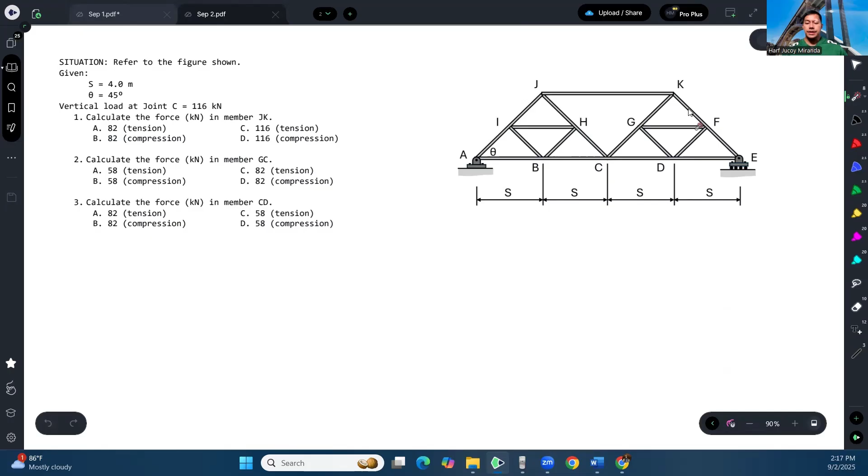Situation. Refer to the figure shown. So this is a truss. So you're given the dimension as 4 meters. So this is 4 meters. And then the angle is 45 degrees. Ito daw ay 45 degrees.

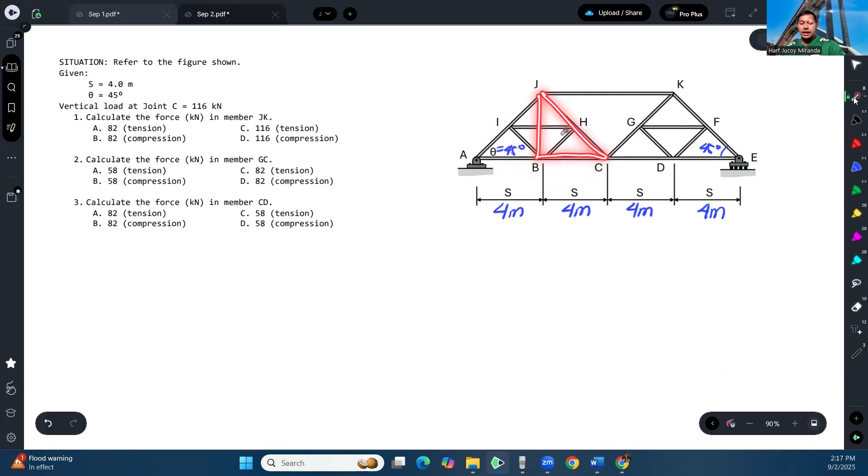Okay, so due to symmetry, we can assume na 45 degrees na rin ang kabila. Okay? Tapos, ganun din to. 45 na rin to. Kasi equal lang naman yung layo nito dito. So parang lumalabas itong triangle na to. 45 ito. Tapos sa gitna siya. So ibig sabihin, itong left triangle should be the same as this right triangle. So this would be 45 as well.

Okay? And with that said, we can measure that this height can be figured out to be also 4 meters. Why? Kasi if you draw a vertical line here and analyze this triangle, makikita mo na yung triangle na yon is 4 meters ito, tapos 45 degrees ito, so 90 ito, so 45 ito. So, ibig sabihin, 45-45-90 na triangle. So, dahil doon, isosceles triangle siya, so therefore, this is also 4 meters.

Okay? So, vertical load is at joint C. So, meron daw force dito, 116 kilonewton. Okay? So, ang question, what is the force in member JK? Ito. What is the force in member GC? Ito, member na to. And what is the force in member CD? Isa dito. Okay? So, the fastest way to solve these three is to use method of sections.

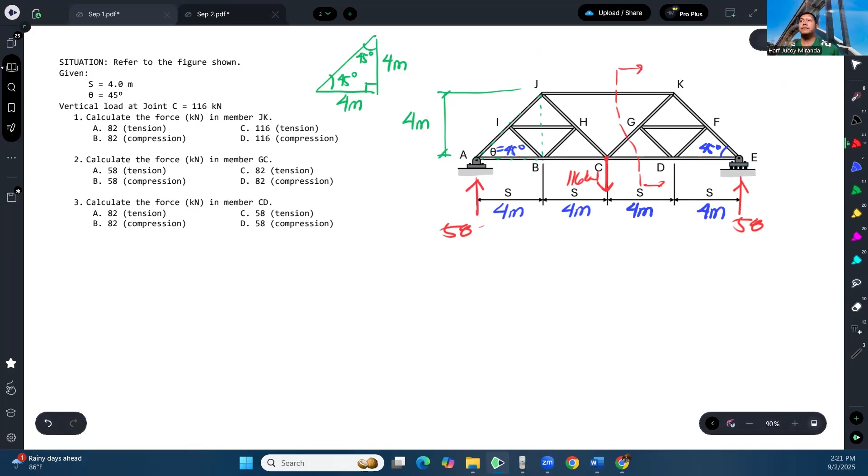All right, so now we are ready to compute for the member forces na required. So gagawin ko, magka-cut lang ako dito. Okay, and then I will isolate this side. Okay? So, ito kunwari yun.

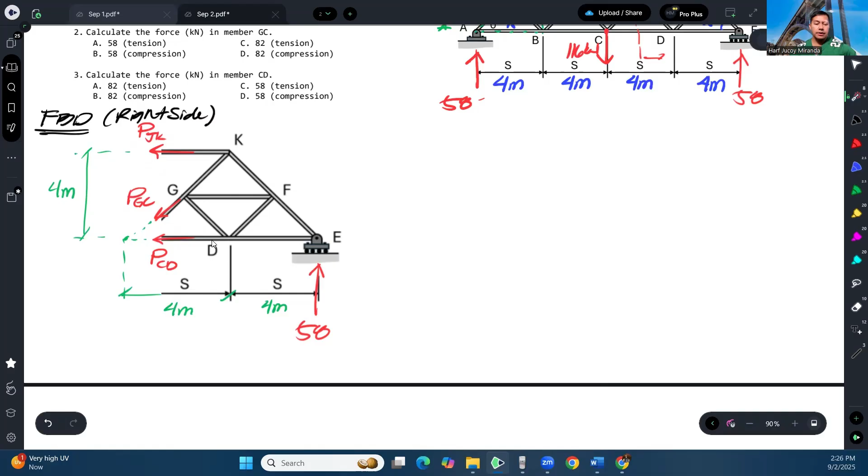Now, to solve for this, we will just apply equilibrium equations. No? So to solve for, let's say, ano ba unang tinatanong? JK. So I will just employ summation of moment. No?

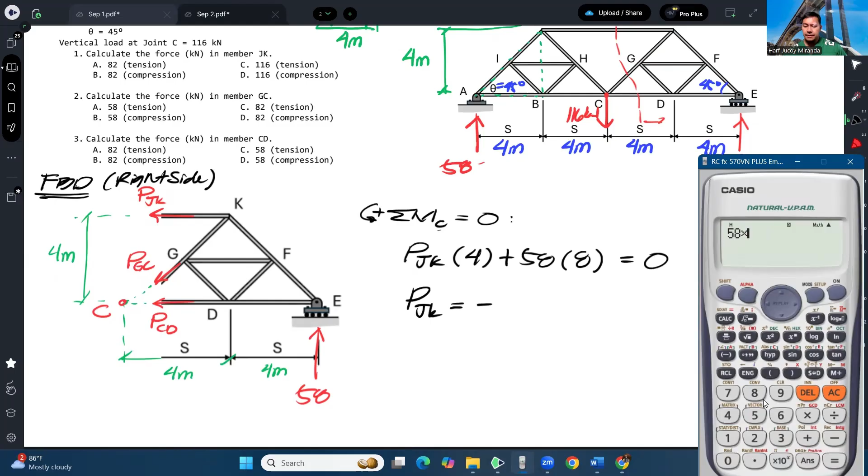So solving for JK now, that will give me negative, kasi na-transpose mo sa kabila yan eh. So lalabas siya 58 times 8 over 4. So that's negative 116. Okay? So sa assumption ko na tension, ibig sabihin mali yun kasi nag-negative. So that's why ang JK natin would be 116 kilonewton na compression. Okay, so therefore, ang sagot natin sa number 1 is letter D.

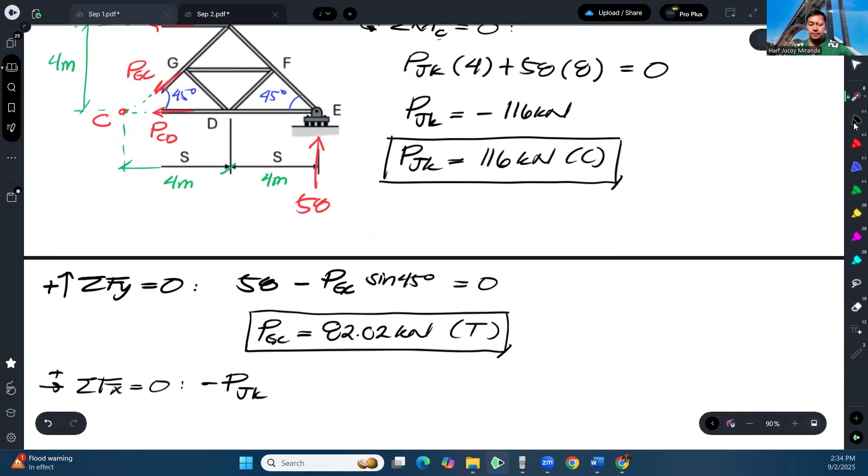Okay? Ito rin, GC. So, to the left yan, no? So, negative PGC, tapos cosine of 45, yung x component. And then negative of PCD to the left. That's it, no? All equal to 0. Wala naman kasi itong horizontal reaction, di ba?

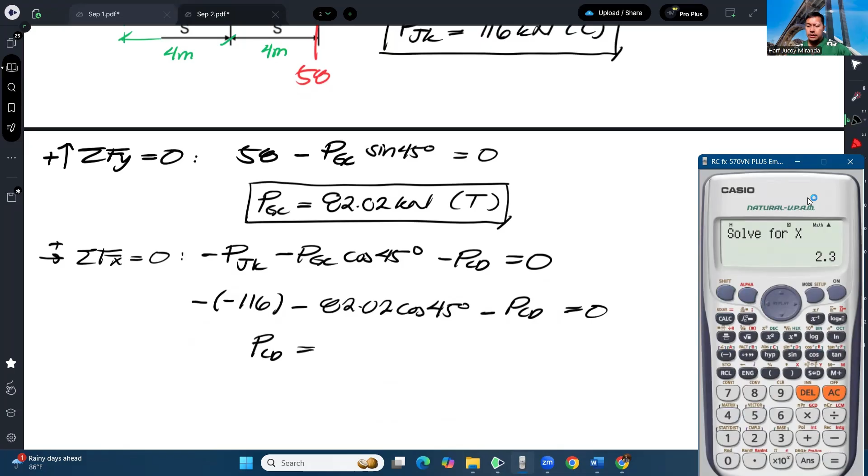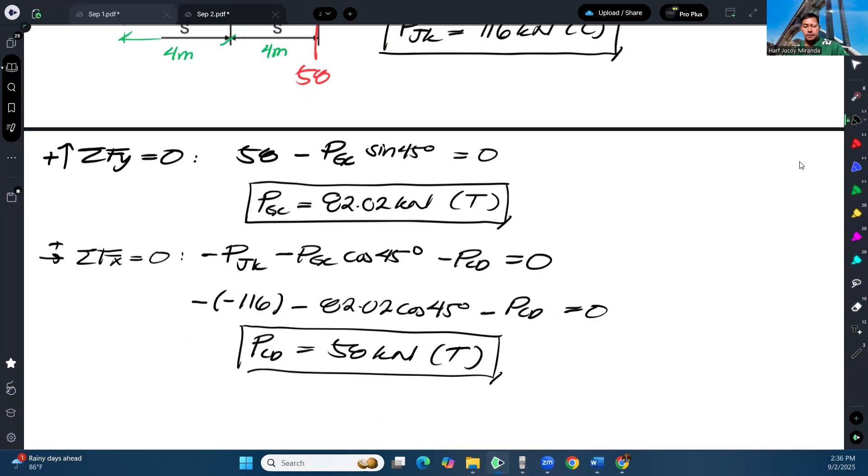Dito walang kaso. Okay, and then we can solve for PCD. So we have 116 na positive minus yung PGC cosine 45 minus yung PCD. Ayan, so that gives me 58 na positive. 58 kilonewtons sa positive, meaning tension din ito. Okay, so 58 na tension.

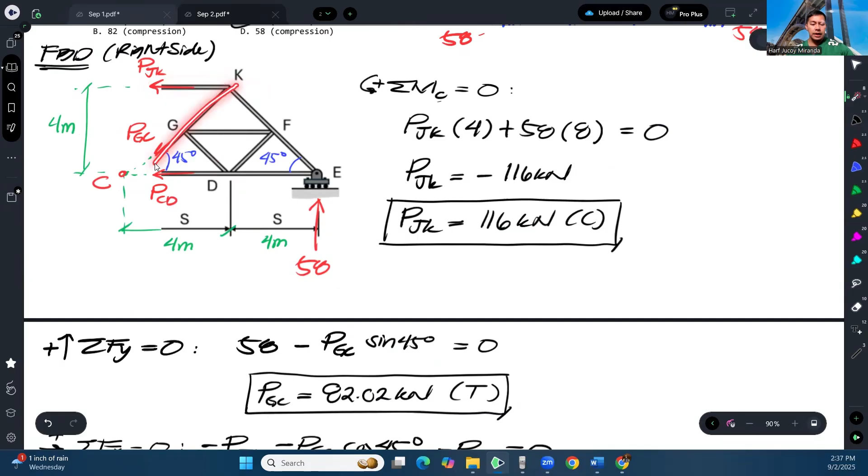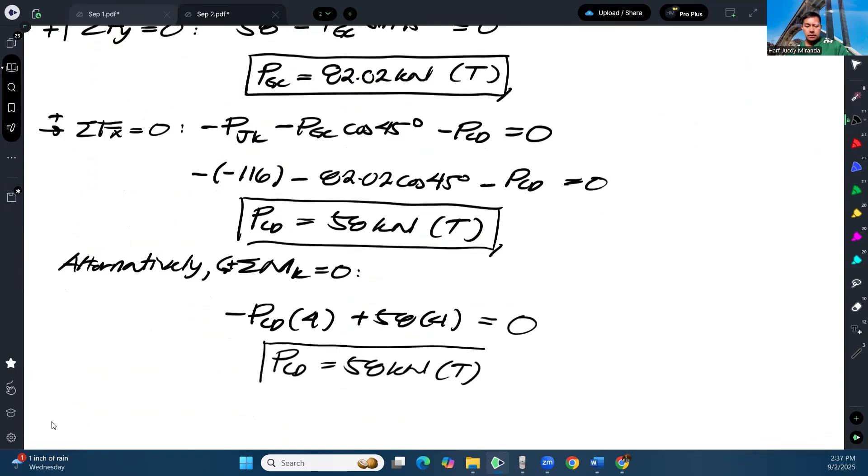So pag nag-moment ka dito, walang moment yung dalawa, tapos ito, iikot, PCD. So PCD, ang moment arm ay 4, tas clockwise. Di ba? Clockwise. Tapos ito, counterclockwise. Ang moment arm niyan, 4 meters lang din. So dito, klarong-klaro that PCD is equal to positive 58 kilonewtons. Okay, so same lang. Alright? And that's how we solve this problem.